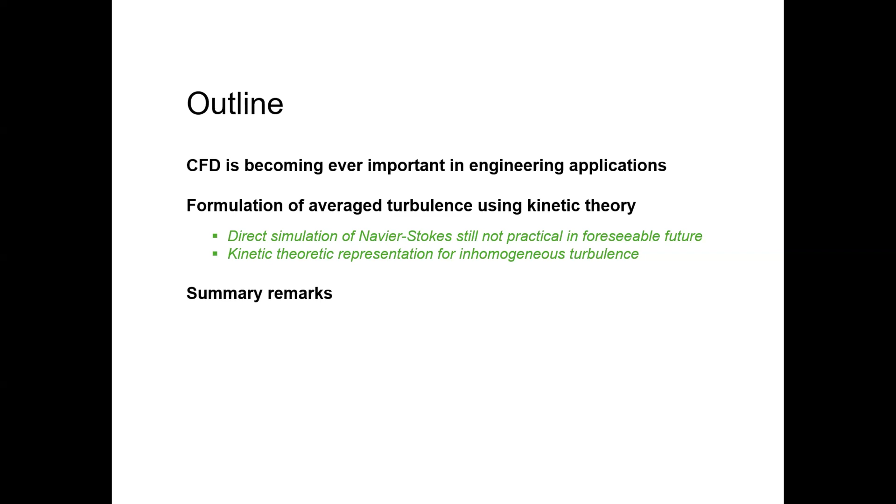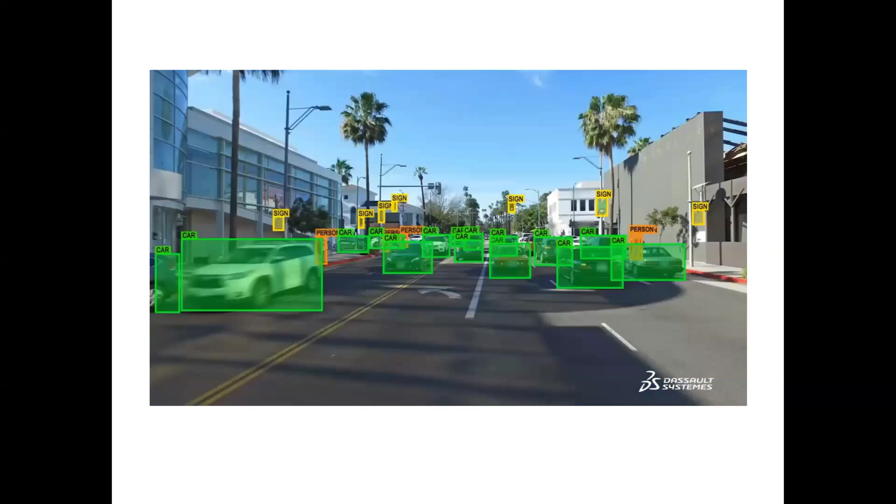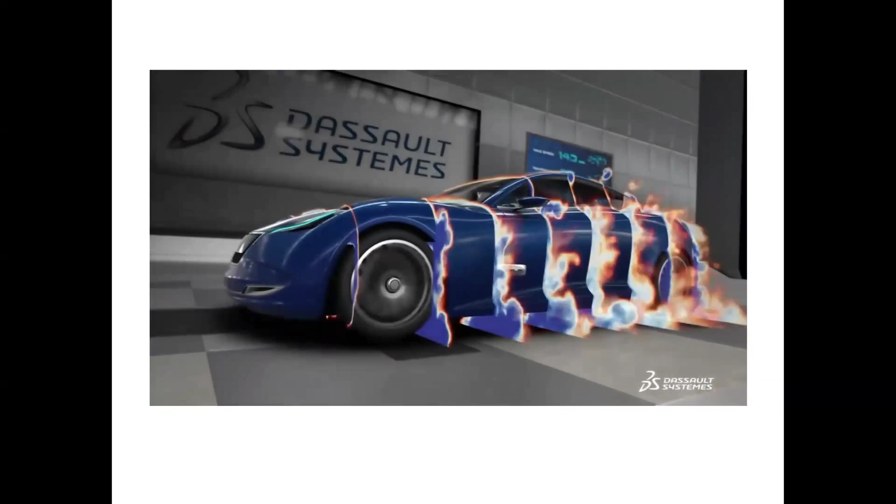The automotive industry is undergoing disruptive changes. Vehicle electrification, autonomy, and connectivity are required to meet customer demand and new, more stringent regulatory requirements. At the same time, a broader, more aggressive competitive landscape and consumer style-based buying systems require automakers to create more visually appealing designs in ever shorter development cycles. Vehicle shape greatly impacts aerodynamic behavior, which in turn influences the performance and regulatory compliance targets that engineering teams are mandated to meet for range, efficiency, and handling.

Traditional development and testing processes that rely heavily on physical models and wind tunnels are not able to keep up with this changing environment. Full vehicle prototypes are expensive - these are all virtual. Wind tunnel time is a scarce and expensive resource, and reliance on it can lead to bottlenecks in the development process. These factors increase cost and add risk to meeting on-time product launch. On top of this, the number of vehicle variants required for testing has greatly increased, further stressing testing resources. With the penalties of not meeting updated regulatory requirements potentially reaching billions of dollars, manufacturers need to find more efficient aerodynamic assessment and compliance solutions.

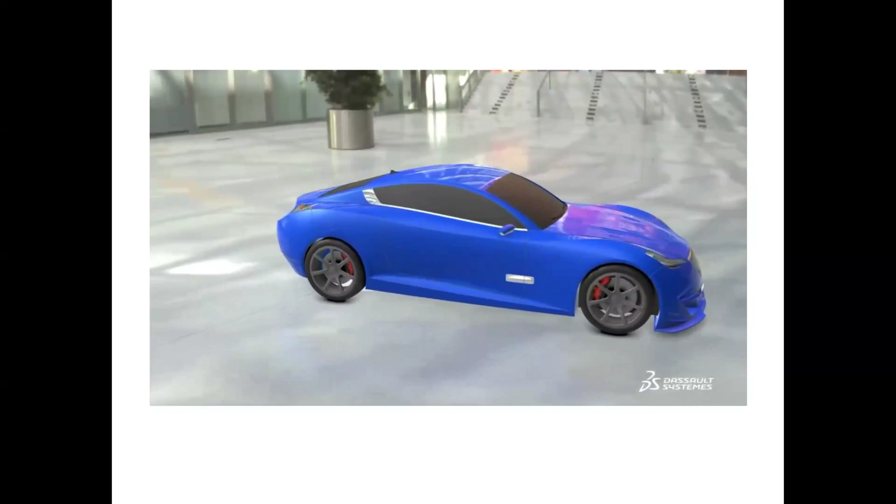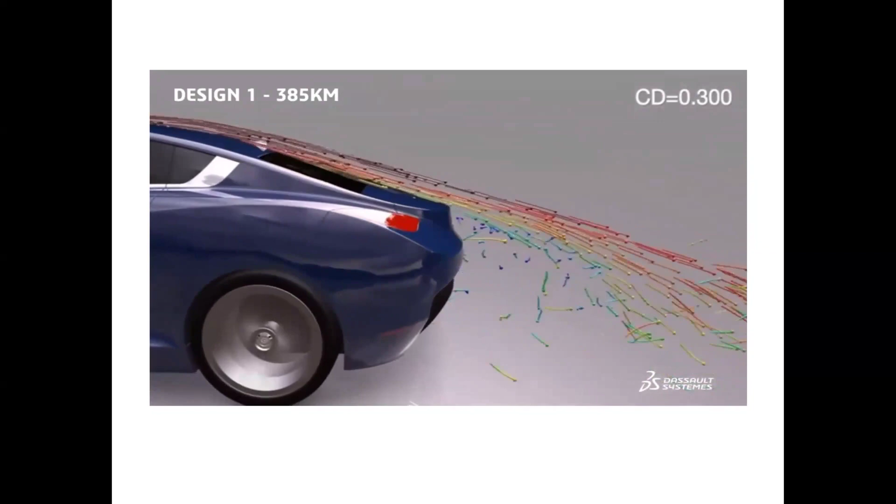With SIMULIA's vehicle aerodynamics industry process, you now have the ability to address all of these with confidence. Beginning in the concept phase, designers are able to get rapid, early feedback on how their shapes will perform and collaborate with engineers to ensure performance requirements can be met, leading to reduced design churn. This process is expedited with an intuitive and collaborative interface to quickly visualize results and provide simple guidance on how to improve performance.

Moving to the detailed design phase, engineers are able to use fully detailed geometry, eliminating time-consuming and accuracy-reducing geometry simplification. They optimize performance of vehicle designs with best-in-class accuracy using a transient Lattice-Boltzmann-based PowerFLOW solver.

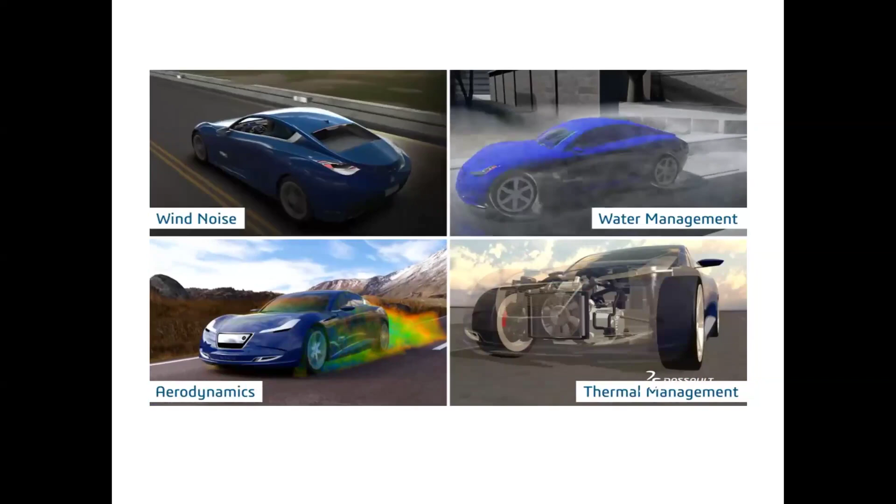Since aerodynamic performance is not the only requirement for design, the guide enables collaboration with other engineering teams to balance competing objectives for wind noise, water management, and engine cooling.

Once all performance objectives are met, engineering teams complete the transition to digital regulatory compliance tests, ensuring they meet certification requirements across all vehicle variants with the accuracy and geometry fidelity needed. With Simulia's vehicle aerodynamics industry process, we will enable innovative styling and prevent late-stage failures.

All right, I have to go a little faster.

So this is a real example worth mentioning: we have been collaborating with Tesla, and Tesla does not use a real wind tunnel. It really believes in the virtual wind tunnel. We are the collaborator with them, and they started first with a conceptual design, and that turned out to have a drag value that was too high.

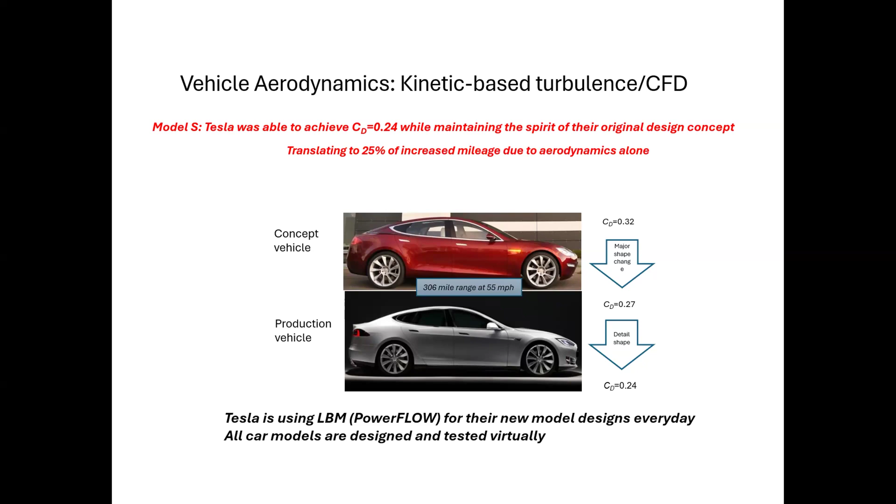After iteration of the shape, we were able to reduce it significantly to the final value of 0.24 CD, one of the lowest for sedans in the world in terms of CD. That is very important for Tesla to be a successful company using only digital experiments. I just wanted to mention that.

So now let me quickly summarize my understanding through the years of why lattice Boltzmann. First, lattice Boltzmann recovers Navier-Stokes under certain well-known conditions, and that does not need too much explanation to this audience.

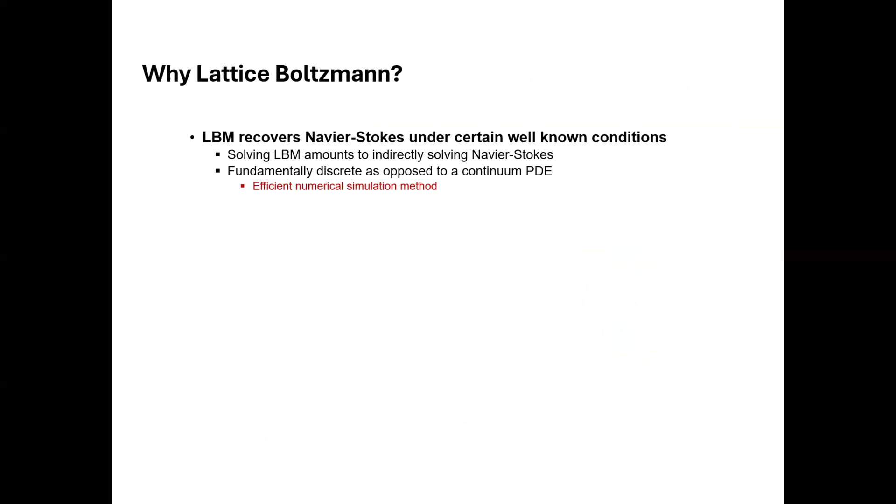Secondly, I would say it enjoys something that a regular CFD might not have. First of all, I would really emphasize the analog of particle dynamics in discrete space-time, at least in the original LGA spirit. Because of that, it really had this set of features.

The third one is more practical: at least in the original form, lattice Boltzmann's advection is one-to-one. That does not have the numerical smearing, which is impossible for Navier-Stokes based methods to avoid. Because of that, it's simple, time explicit, and highly transient, which allows for better simulation of turbulent flow, including large eddy simulation.

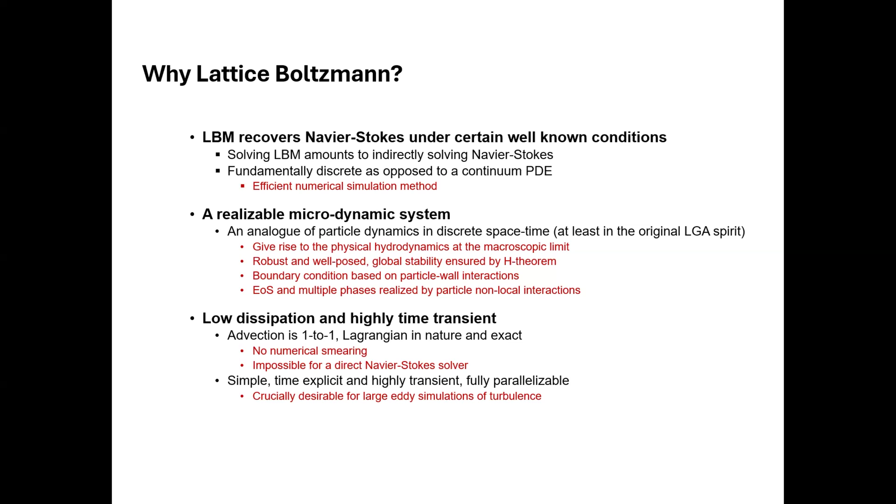So that is a good segue to the later theoretical part of my presentation. Now I'm turning to aerospace. Lattice Boltzmann, one of the limitations in the early version, is the Mach number limitation. So we have to really increase the Mach number, and recently I'm glad that many groups have been making a lot of advancements on this.

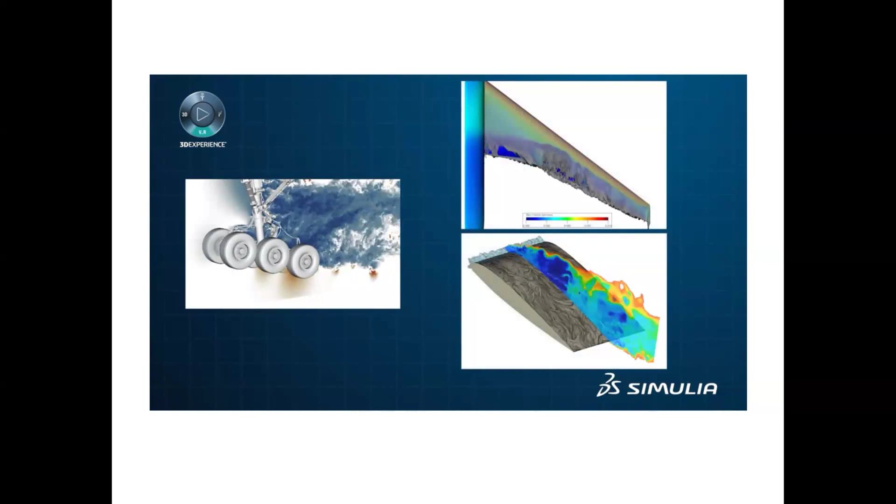This talk is about high lift, one of the unsolved problems. There are also some other things. Traditional fluid simulation tools struggle with these configurations, and difficult tests are still standard.

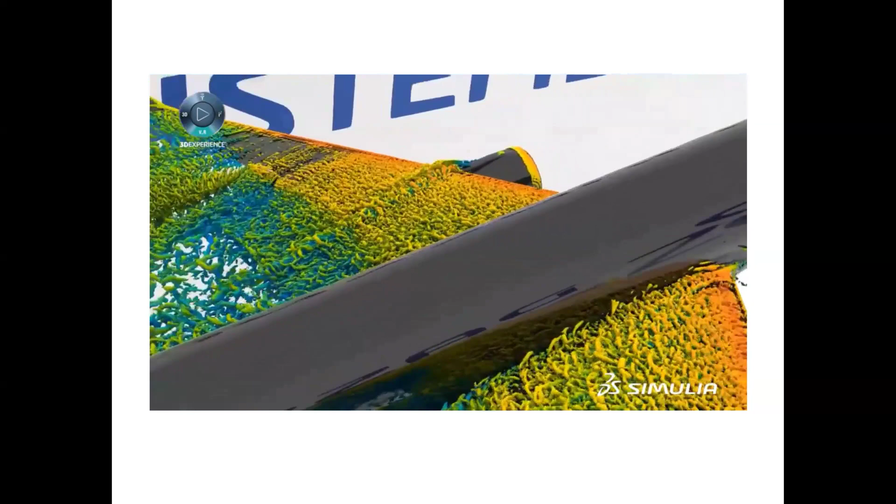This leads to expensive and time-consuming development, delays in flight certification, and increased cost and risk in developing future concepts. But SIMULIA fluid solutions offer a breakthrough in accurately predicting the highly complex and unstable phenomena that determine aircraft characteristics for all of these situations.

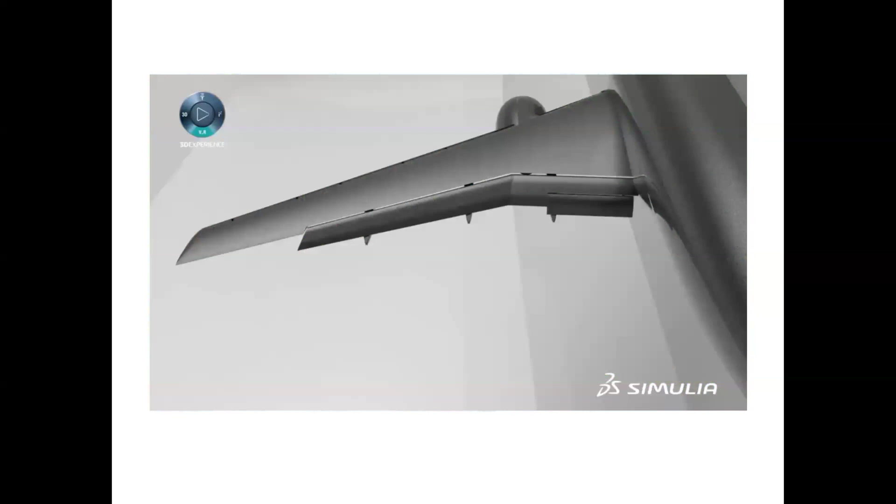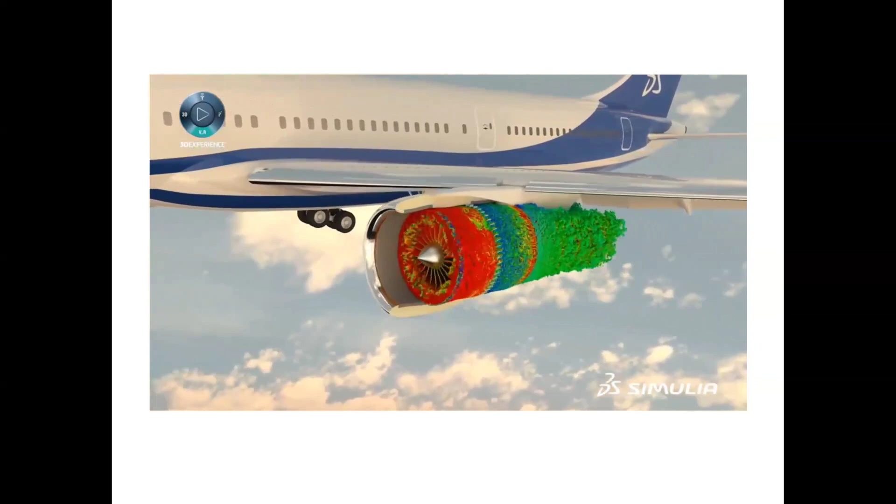Of particular importance is the ability to understand how airflow over the wing breaks down at very high angles of attack. SIMULIA fluid solutions are able to assess the impact of extremely complex geometric details on flow behavior, the influence of the jet engine on a high lift system, and buffet onset at high speeds, allowing you to predict stall with proven accuracy.

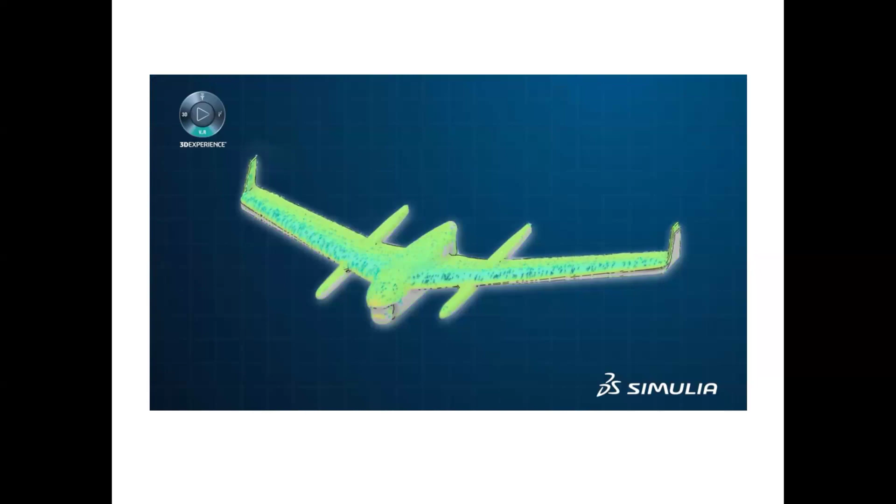SIMULIA fluid solutions on the 3DEXPERIENCE platform allow you to develop digital prototypes through virtual testing of real-world designs. By coupling dynamic loading between fluids and structural simulations, you can assess the impact of component deflections on aerodynamics, greatly improving and strengthening the design.

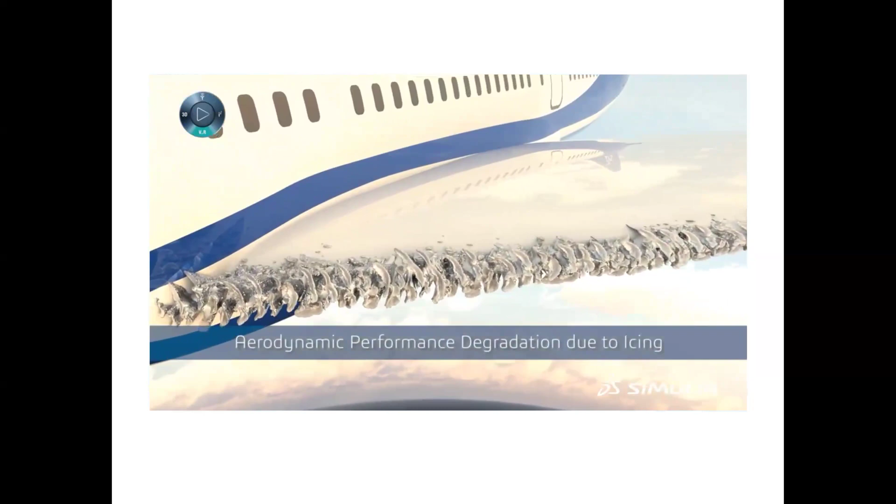SIMULIA fluid solutions allow you to augment and often replace physical tests. You can also gain insights into flow behavior that are simply not possible with physical testing. In the end, you'll be able to reduce development and certification risks, prototyping costs, and time to market, all while providing optimal aerodynamics and establishing greater confidence in overall performance.

One of the problems is how to predict flow separation on an airplane when it is at a high lift position, and this is one of the challenging issues in aerospace.

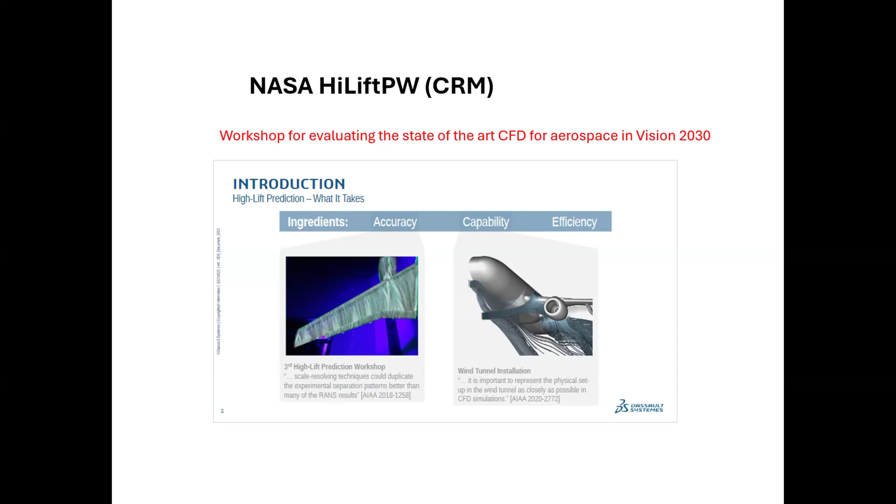So there has been a workshop on this, referred to as Vision 2030. NASA provides real tests and invites world CFD groups to participate and submit their numerical results. The submission of results has to be compared blindly to the physical test results, and that has been going on, still ongoing.

One thing I want to mention is this experimental measurement. There are many other measurements, like the pressure distribution and so on, but I just want to show something that shows the flow separation. This is like oil flow on the surface of a wing.

From this, you can see that the onset of separation happened at the base of the airfoil, at the junction between the wing and the body. If you use the traditional RANS model, and these are two representative RANS-based software,

they actually show the separation starting behind the engine, which is wrong. You can also perform lattice Boltzmann with RANS, or URANS, meaning unsteady RANS, and it shows the same thing: the flow starts to separate behind the engine.

Only if you have the LBM combined with proper turbulence modeling will you be able to capture this correct flow separation phenomenon. So when we submitted it, we don't believe in URANS, we use LBM plus VLES, and that's the result we submitted to NASA. We did not know beforehand the experimental results, and it turned out that we are one of the, if not the only one, that actually gave the correct prediction. That was quite an important achievement.

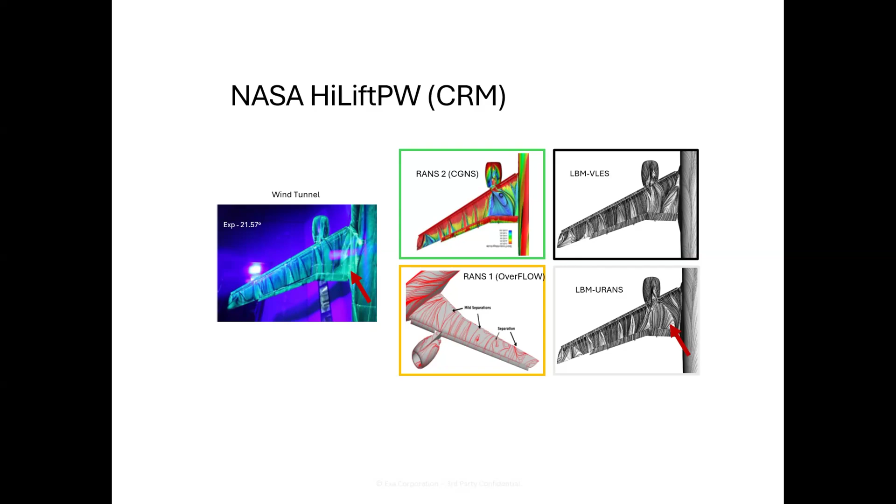It has been almost 100 years, or at least 50 years, that we know turbulence simulation cannot be done directly numerically by existing computers or even foreseeable computers. So it has been a field of important study in physics, that we had to somehow only calculate the average behavior of turbulence. Unfortunately, turbulence is highly nonlinear and highly chaotic. Therefore, people have great confidence in the validity of Navier-Stokes, at least for the regular flow regime.

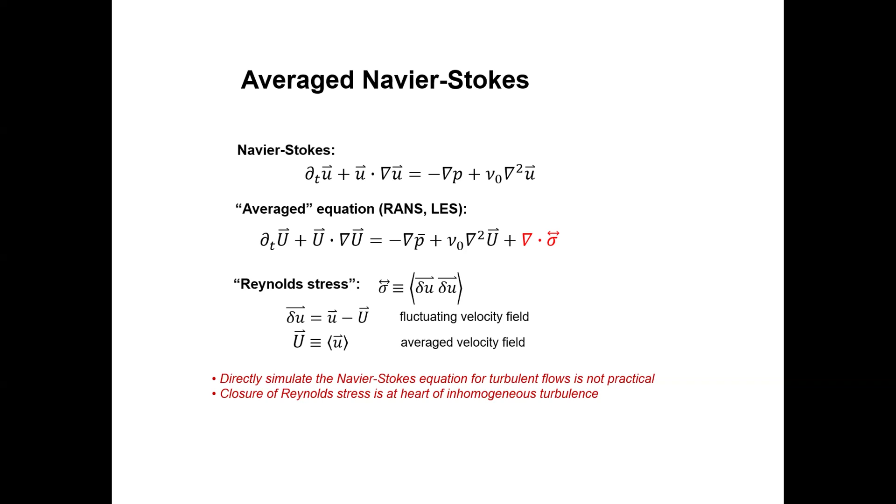So they started off by averaging the Navier-Stokes equation. But when you average the equation, you find there is an additional term, and that is the well-known Reynolds stress term. So the question has been, how do we represent this Reynolds stress term in terms of averaged quantities? That's the famous, or infamous, closure problem.

Now let's look at the Reynolds stress term. For many years, or even till this day, the most popular approximation of the Reynolds stress term is the so-called Boussinesq approximation. It has this form. For people who know a lot about kinetic theory, this form is really analogous to what comes out from the derivation from molecular dynamics to Navier-Stokes. K is the diagonal term of the Reynolds stress term, and the off-diagonal term is the average rate of strain tensor.

The assumption is that eddies behave like molecules, providing this viscous effect and pressure effect. However, we know that's a very crude assumption, because if you look at the eddy distribution in wave number space, you find this distribution is very continuous. So there is no separation of scale, unlike molecules to flow in regular kinetic theory. If you do some hand-waving estimation, you find the mean free path, according to this analysis, gives a Knudsen number of about 0.1 to 1.

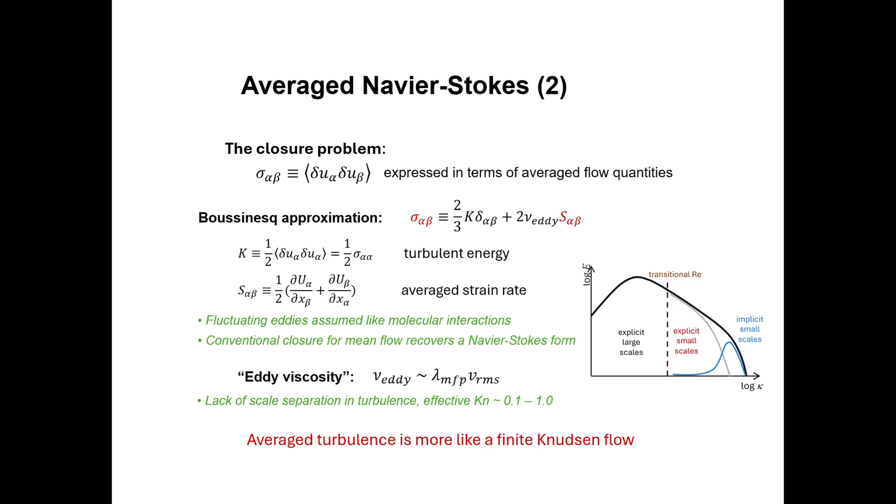Therefore, it is more like a finite Knudsen number flow for average turbulence. This is a bit controversial, how do I say it, that Navier-Stokes is a Newtonian flow, yet the average Navier-Stokes behaves like a non-Newtonian flow. If you think a little bit more, you realize this is not actually controversial, but if you don't think too much, you might assume that it is. There is some experimental support for this.

This is like a pipe flow, not a small pipe, a regular big pipe with highly turbulent, fully developed turbulent flow. You find that the flow is not just unidirectional, but has also a secondary flow pattern, and that's quite a characteristic of a non-Newtonian flow. That's one average turbulent flow phenomenon.

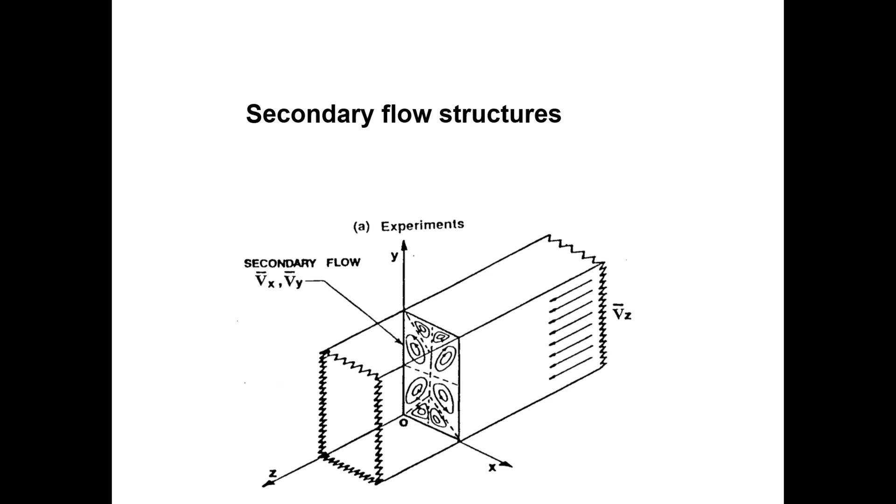The second one is when you have a sudden shear applied to a turbulent shear flow, you find the growth of the turbulent kinetic energy is not according to regular eddy viscosity modeling. It actually dips, it has a delay, the energy first goes down before it rises because of viscous dissipation. So this is another support for the idea that average turbulent flow behaves like a non-Newtonian flow.

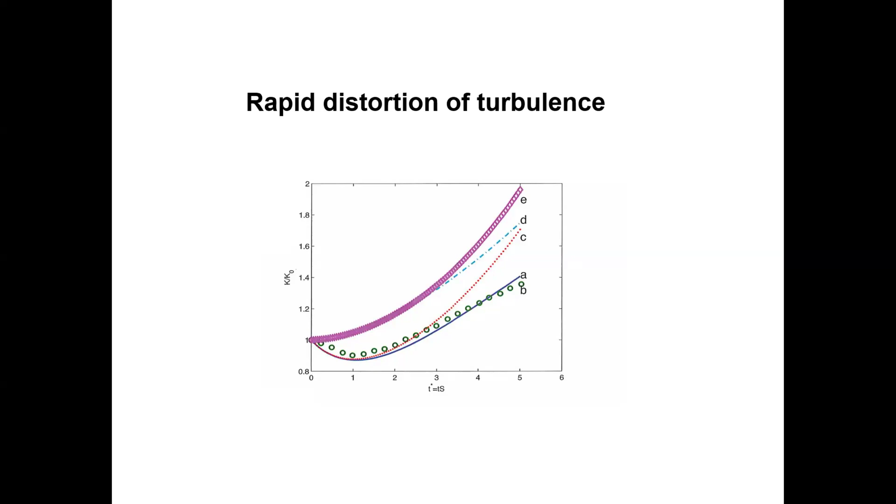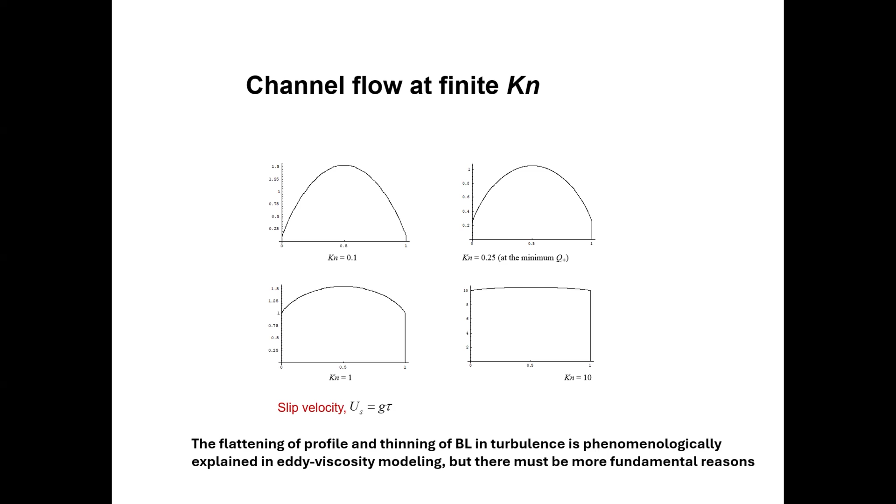So that led, about 20 years ago, my great friend who sadly passed away about 10 years ago and I were thinking about why can't we restart understanding turbulence from averaging of the Boltzmann equation. Because the Boltzmann equation naturally includes all the information, including Navier-Stokes—it clearly covers from a viscous regime to Knudsen regime and so on. So that is quite a reasonable thinking.

However, when we take the average of that equation, we quickly run into an issue: because in regular kinetic theory based on molecular motions, the particles move very, very fast. Their speed is about the square root of temperature, which is a much bigger quantity, at least for near incompressible flow—much, much greater than the turbulent kinetic energy.

And therefore, you run into averaging of a quantity, temperature, that cannot be easily eliminated. Because in the end, turbulence should not depend on another dynamic quantity like temperature—it should only include the turbulent quantity itself, especially in the incompressible turbulent regime. And if you have another physical quantity that has some physical dimensions, it also screws up all the scaling laws. Therefore, this turned into a no-go.

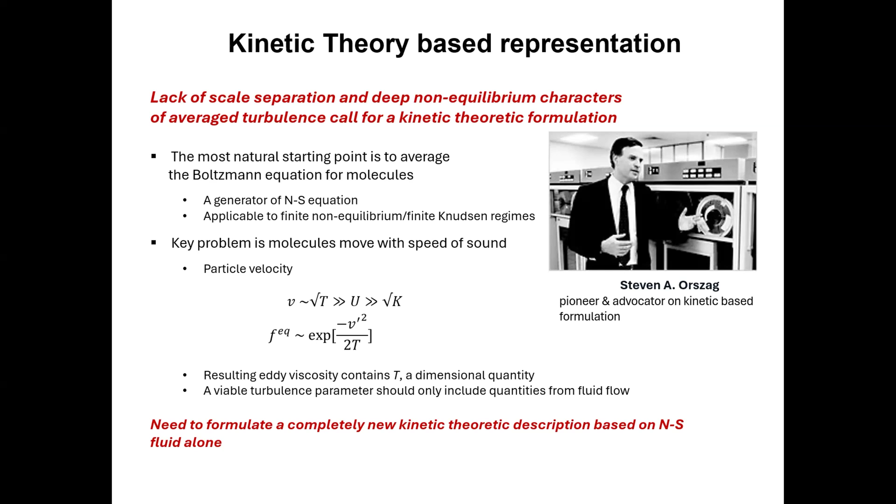I'm not saying this is impossible, but at least we cannot see any way to circumvent it. But I think the idea is very important. So now there is a new way of thinking.

Recently, we thought: why can't we, instead of looking at molecule motions, think of motions of the flow itself? So we could put representative points in the flow. These are like fictitious molecules, but they are not molecular motion—they follow exactly according to Navier-Stokes flow.

So you have a discrete representation of these points in terms of F. And when you have that motion, you can immediately, very trivially, derive an equation that looks exactly in the form of the Klimontovich equation, which people who studied plasma physics should know very well. Because it is exact for obeying the motion of the fluid flow, it has no collision term on the right hand side.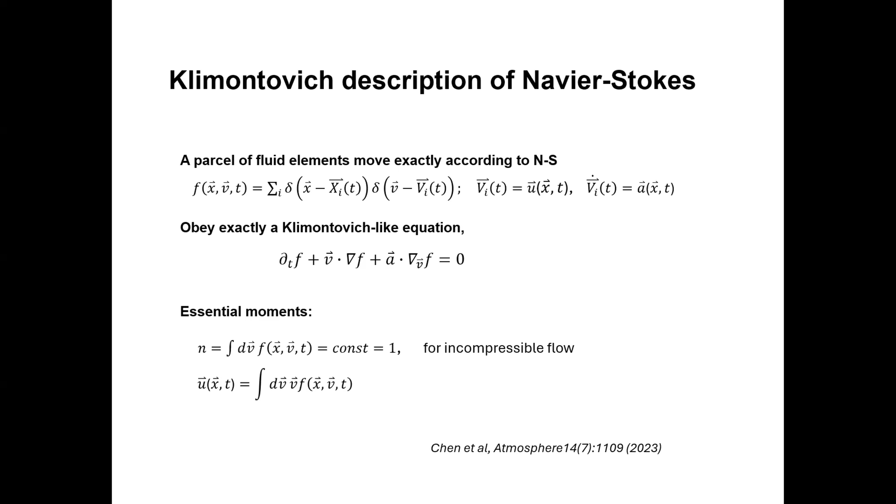When you sum over this particle distribution function, you immediately get the desired flow properties, such as flow density, which is trivially 1 for incompressible flow, and flow velocity. This flow velocity actually obeys the Navier-Stokes, but let me say a bit more about that.

So when you take the moment integral of the Klimontovich equation, you find it results in this second equation. And then you immediately see, since the forcing term or acceleration term A is given by the pressure and the viscous term, and the pressure is also solved by knowledge of the velocity field, this velocity moment obeys exactly the Navier-Stokes fluid equation—and this is constructed out of first principles.

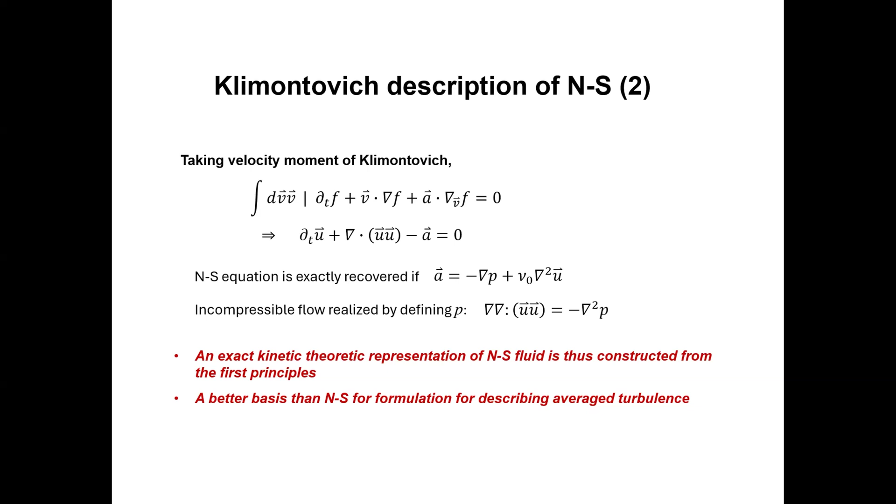And since we have this representation, now we could do some averaging from this point of view. So I have a Klimontovich equation that exactly obeys the Navier-Stokes. Now I can do an average over that to get an averaged turbulent flow behavior. So now I take an average over this Klimontovich equation.

So I got very easily, the capital F is the average distribution function. And then you have these average terms on the left-hand side, and there's also a term, fluctuation of the acceleration interacting with the fluctuation of F. But interestingly, the right-hand side, you can do easy calculation. You find that it satisfies mass and momentum conservation. And that tells us it is very much like a collision, and I'll say why it's like a collision more later.

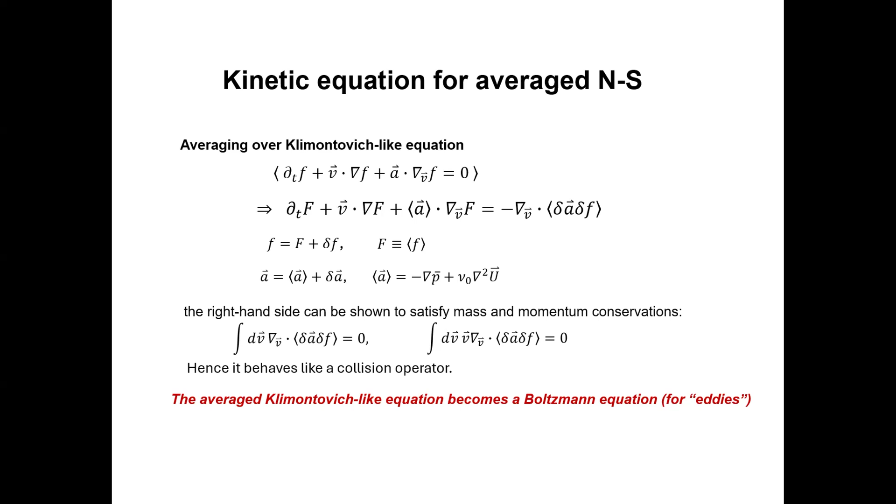So interestingly, the average equation of the Klimontovich looks like the Boltzmann equation. And the left-hand side also has an acceleration term, which is governed by the average pressure gradient and average flow velocity.

So now you have this effective Boltzmann equation. And then you take a moment of that equation, you'll find it also recovers the averaged Reynolds-averaged equation for the capital U. And this Reynolds stress tensor, you'll find it is given by the moment integral of the capital F. And also the kinetic energy is a trace of this moment of capital F.

And so it's interesting that now the kinetic energy plays the role of temperature for regular molecules, but it's a turbulent kinetic energy. The Reynolds stress now is completely determined as soon as you have knowledge of capital F.

And further on, when you have knowledge of capital F by solving this equation, you can not only calculate the second moment, which is the Reynolds stress, but you can calculate any nth moment, as long as F is known. So it has far more information than the Reynolds stress would provide.

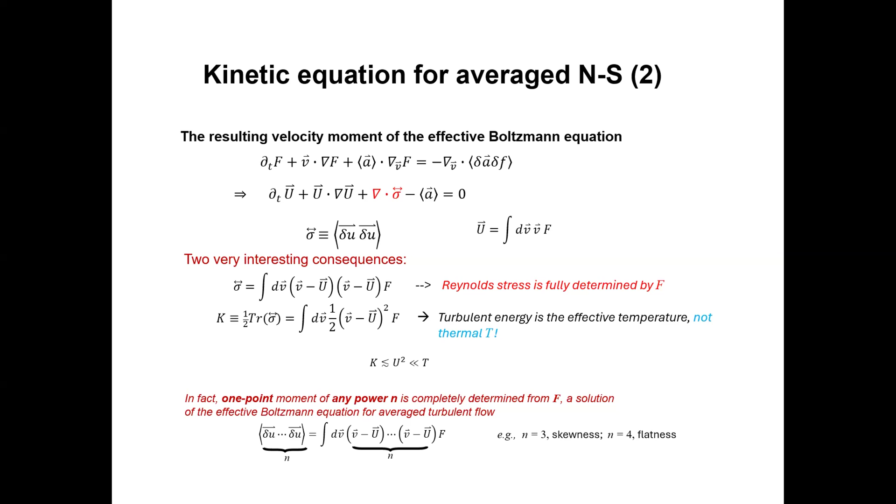Okay, now let's talk about the collision. We find that the form of the collision is the interaction of the force with the fluctuation of distribution. You can write it down because it's an average, and an average is many fluctuations taken together.

So it is actually a random walk in momentum space, small random walks, and that is a more natural explanation. Again here I'm saying it satisfies conservation of mass and momentum, but there's one twist: it does not satisfy energy conservation, because fluid flow itself does not conserve energy. It actually dissipates energy into heat. So it is not energy conserved, but it has a leakage to real kinetic motions, which is the heat, given by the turbulent dissipation.

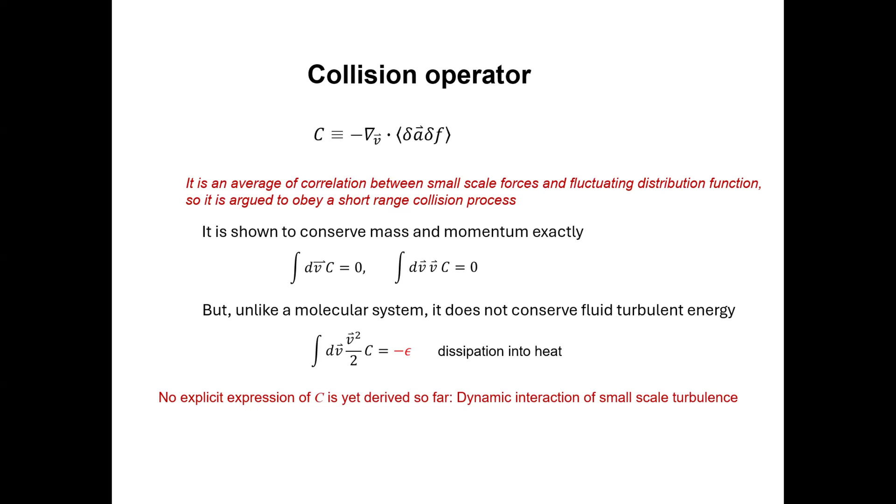Now let's look at what this collision does. I was saying it behaves like a random walk in momentum space, and that naturally gives the explanation of why the 1-point PDF of turbulent flow has a Gaussian form. The 1-point is Gaussian, and in the past many people have postulated why the 1-point PDF is Gaussian, while the 2-point is not Gaussian. But 1-point is Gaussian because of the central limit theorem. However, this gives a more dynamic support of why that is the case.

And then you can easily move into a moving frame with the average velocity, and naturally get the equilibrium distribution of a Boltzmann form. Now in inhomogeneous turbulence, the 1-point PDF is not Gaussian, but the deviation from Gaussian is because of the inhomogeneity. For homogeneous turbulence, the 1-point PDF is Gaussian.

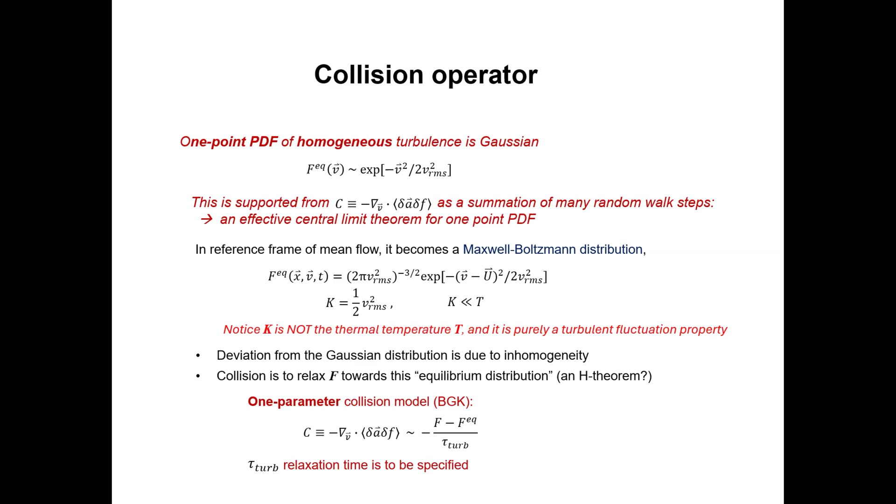All right, now let's look at, suppose we have solved this averaged Boltzmann equation, I mean the effective Boltzmann equation. Now we get the Reynolds stress. Even though the Boltzmann equation does not need a Chapman-Enskog expansion, let's look at the Chapman-Enskog expansion to see what we can learn from it.

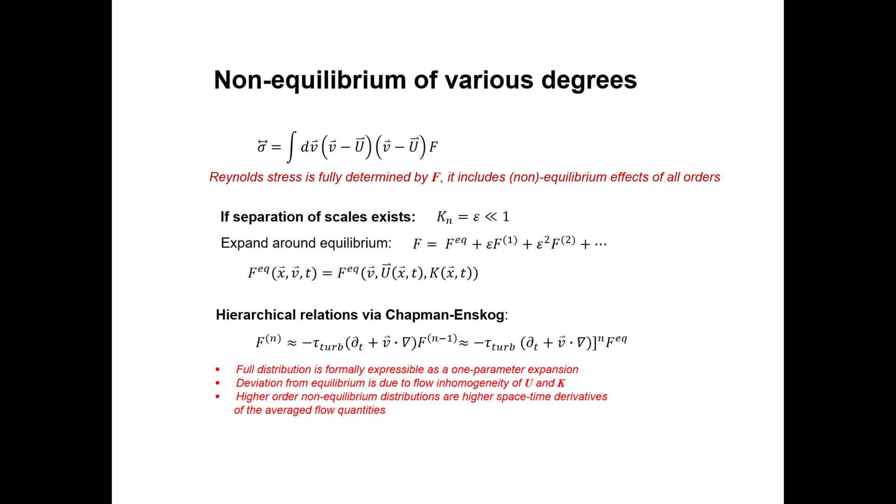So when we perform the Chapman-Enskog expansion, we will find that, after the Chapman-Enskog expansion, you can calculate the Reynolds stress according to the expanded distribution functions around the equilibrium, as I have described.

You will find that the zeroth order is almost a trivial repetition of what we do for molecular kinetic theory. So you have a Euler order, which gives rise to two-thirds of k times the delta function, and k plays the role of temperature. Then you look at the first order, and you find it has this form.

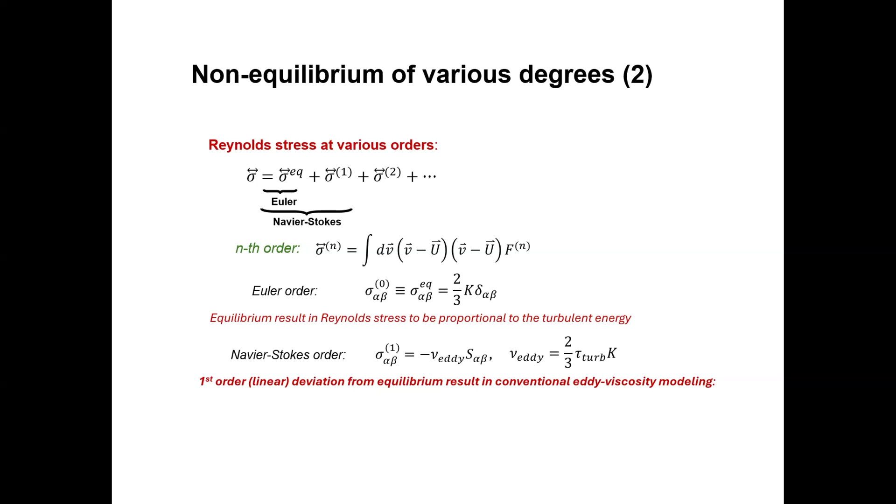The deviatorial part of the Reynolds stress is eddy viscosity times the average rate of strain tensor. The eddy viscosity has this form with a tau term, an unspecified parameter, times k, the turbulence kinetic energy. This is really what the conventional turbulence people have postulated. But since we are dealing with kinetic theory, we don't need to stop at the Navier-Stokes order, we can go beyond.

So we can carry out the straightforward expansion to look at the second order. It is actually a combination of all these so-called secondary invariants, and it has two interesting terms.

The first term is a dt term, responsible for the delay phenomena we saw earlier in the example of turbulent rapid distortion delay, with a delay time of tau again. There's also the second order terms, the SS and S-omega terms, which are responsible for the secondary flow phenomena in channel flow.

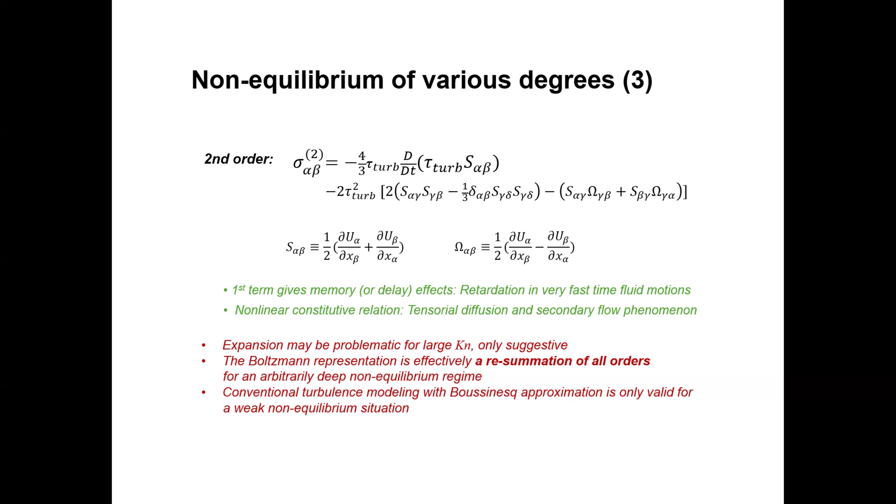Now there is a way to try to close the system and specify the value of tau. Recently we have approached this understanding: the determination of tau determines the famous C mu factor in conventional turbulence modeling. Since we have a kinetic theory, we can apply the fluctuation dissipation theorem to estimate this tau.

So this tau estimation gave the turbulent parameter C mu to be 0.816. Compared to the standard k-epsilon model, C mu is 0.9, and the RG-based turbulence model gives C mu as 0.0845. We know the standard k-epsilon model and RG-based model are empirically based on matching typical benchmark flows, and the RG also has some assumptions made. So it is surprisingly close in terms of values.

From there, we can also further confirm the corresponding Knudsen number of this average turbulence. We found it indeed is around 0.1. That further confirms average turbulent flow is behaving like a finite Knudsen number flow.

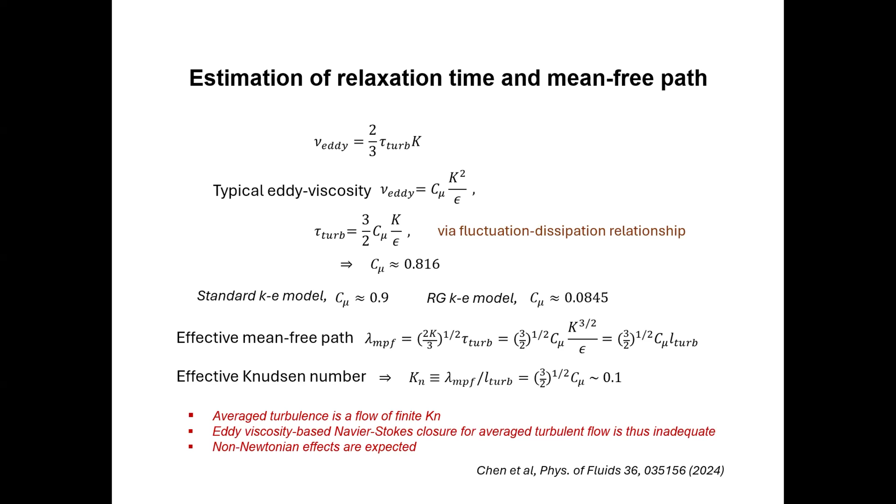We can also use that quantity to compare to the second order nonlinear turbulence models. There are three most representative turbulence models, and they give these parameters, which are empirically based or some kind of approximation. But ours is given below, and is also very close.

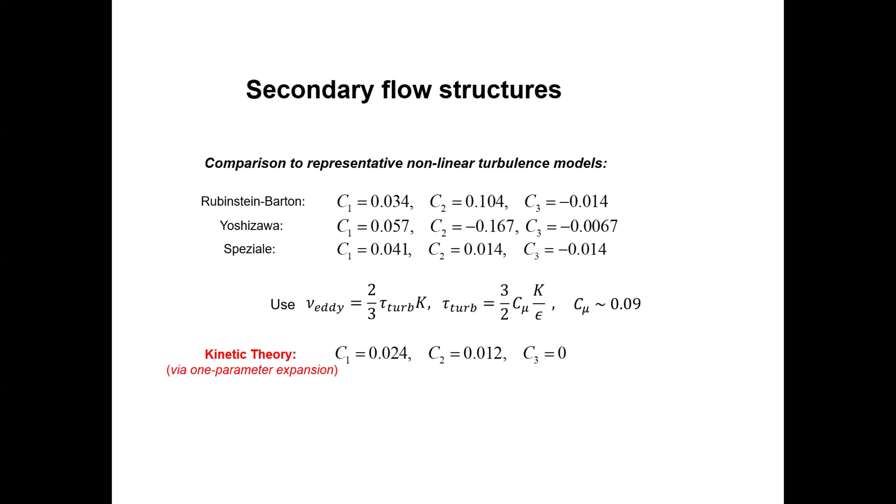They are actually different models, and they can even switch sign. But it's interesting that we have one parameter, tau, that gives rise to all of these unspecified parameters in turbulence modeling.

So now I get to my conclusion. Engineering applications deal with simulation of large-scale averaged inhomogeneous turbulent flows involving boundary conditions, as I demonstrated in real-world engineering applications. Eddy-viscosity-based closure modeling is mostly empirical and inadequate, as we all know, based on an analogy to a molecular system near local equilibrium.

Average turbulence resembles flows of finite Knudsen number due to lack of scale separation and greater departure from equilibrium. Starting from averaging the molecular Boltzmann equation is fundamentally challenging, if not impossible. A kinetic representation is constructed from first principles rather than an analogy, based on a closure concept viable for arbitrary deep non-equilibrium regimes.

Reynolds stress and all higher order one-point moments are fully determined from a solution of the average kinetic equation. One parameter expansion in Knudsen number, to first order, recovers the most popular eddy viscosity models, and to second order compares well with the well-known nonlinear Reynolds stress models.